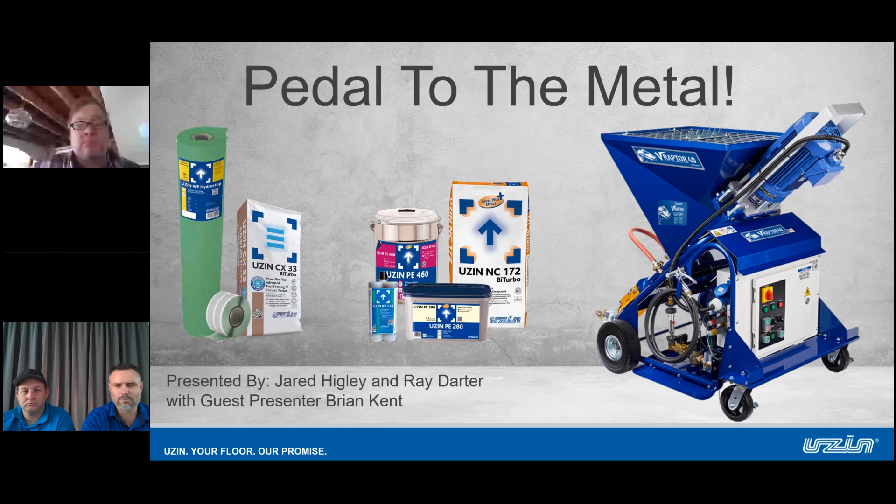We are excited to present to you our three rapid systems today. One of those being the UZIN self-leveling pump. Along with the other systems we're going to share today, we have on the left of the screen there the rapid waterproofing system. And here in the middle, we have the rapid moisture mitigation system.

Good morning, everybody. My name is Brian Kent. I am the pump program manager at UZIN North America. I've been pumping concrete materials for about 26 years now. Been at UZIN for about 3.5.

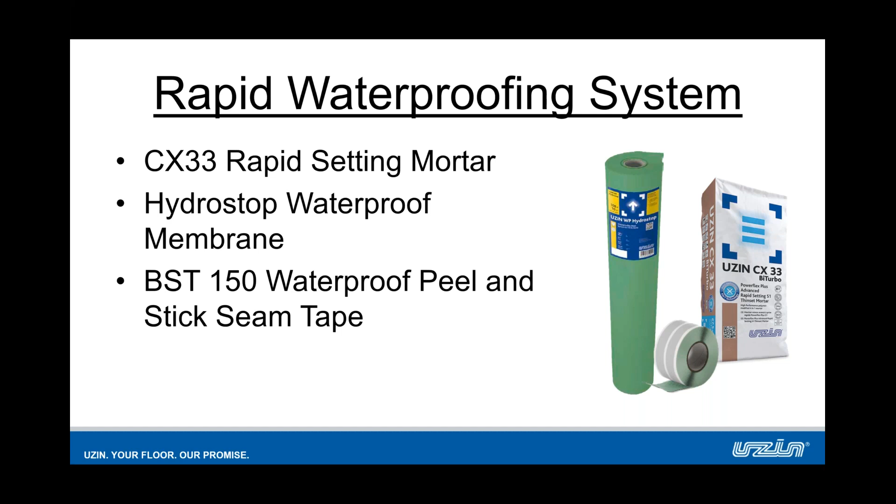Let's talk a little bit about the waterproof system in general. Here's the components for the system, but what is HydroStop? It is a waterproof sheet membrane that is bonded to walls and pans topically with cement-based mortars and adhesives. All of the joints on the membrane are overlapped or they're butted together and gone over the top with seam tape. We use pre-manufactured inside and outside corners to seal those corners.

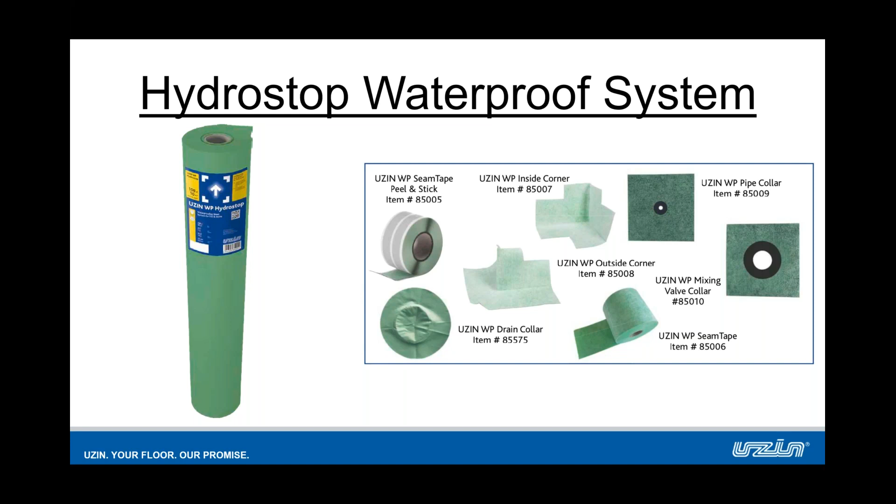We have a mixing valve and a pipe collar, as well as a drain collar there to complete the different components of the system. So what we have with this system is a complete waterproof barrier from topical moisture intrusion. With our rapid system, we want to bond these components of the waterproof system, the HydroStop system, with CX33. CX33 is our speed set.

We can grout in as little as 2.5 hours, but it's so much more than that. We can use this for vertical applications with large format tile based on the non-sag characteristic of this mortar. We have excellent vertical hold here with this mortar. It's very fine, very smooth, which we show there, for easy handling with the trowel. But beyond that, we can use it for any size tile. We can use it for small tile installations as well as large tile installations.

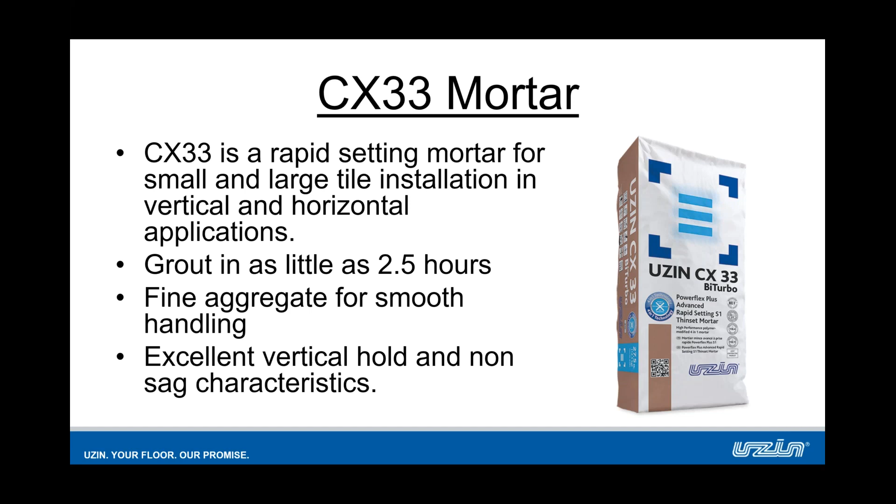Let's talk a little bit more about the HydroStop membrane itself. It's a polyethylene sheet system. The fabric allows us to get a really good bond to our substrate, as well as the thin set bonding with tile to the membrane itself. We get a really good bond with that fabric. But we're not just doing standard waterproofing with this. We are meeting and exceeding the different standards that are out there, from the ANSI 118.10 to the EMICODE EC1 Plus and the ASTM E96.

ASTM E96, we've got a perm rating of 0.05, and that test is measuring a material's permeable value under set conditions. So what does that 0.05 mean? Well, anything 0.5 and below can be used for waterproofing in a steam shower application, even commercial steam shower applications, without the need of a secondary waterproof membrane. Okay, so we're well below that benchmark.

We're at 0.05. The ANSI 118.10, this is the standard that our industry uses for waterproofing membranes. We're meeting expectations with no fungus growth, with no water penetration with the waterproofness test. But then we're exceeding expectations with our breaking strength. The 118.10 calls out for 170 pounds. We're at 865 pounds breaking strength. It calls out for 8 pounds of seam strength, and we're at 48 pounds with seam strength. So we're exceeding that standard.

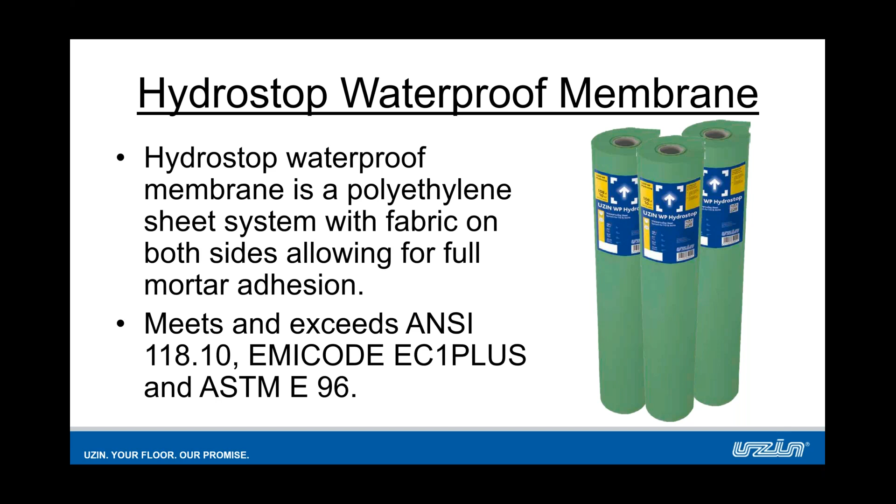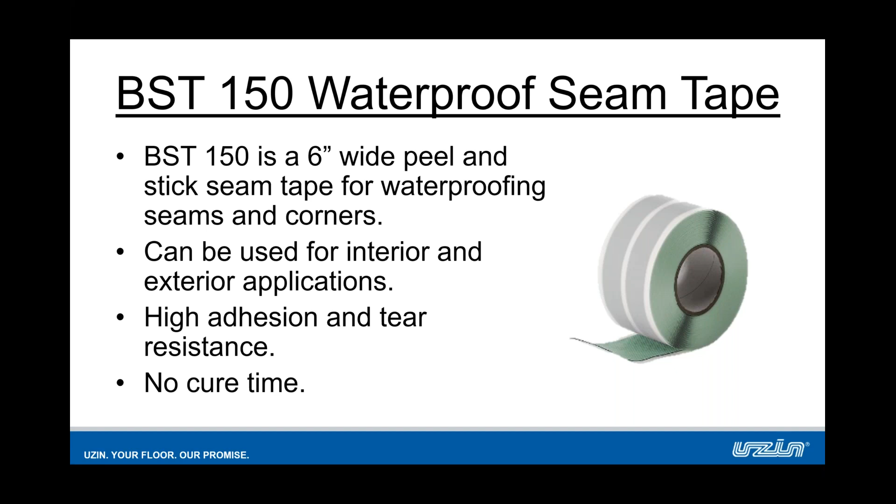And the final component of our system, we have the BST 150 waterproof seam tape. No cure time. That's the important part of this product. We can peel and stick and put this down over our change in plane where our wall meets our pan. Any seams that are butting up against each other, we can use this to go over the top with no cure time. And when we're utilizing these components, we have no downtime. We can flood test immediately with the use of CX33, HydroStop, and BST 150.

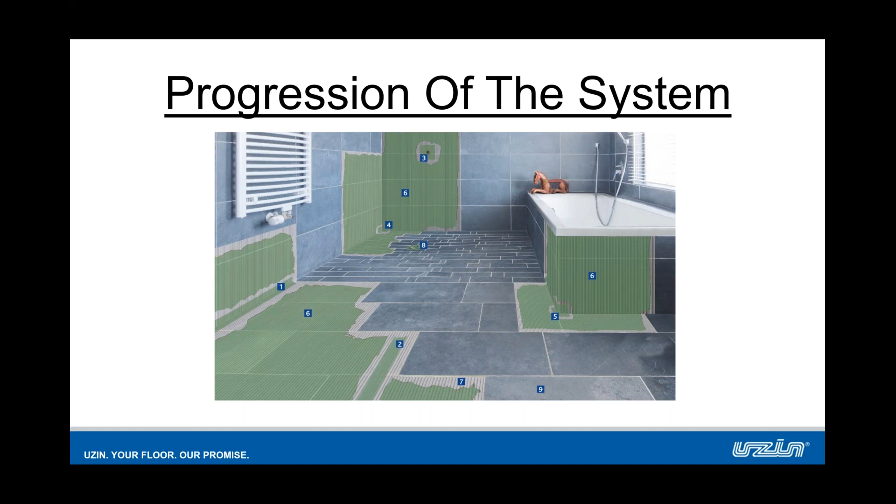And where can we use this system? We can use it in residential, commercial showers, multifamily, hospitality, commercial. And again, we're going beyond typical showers to commercial and commercial steam showers.

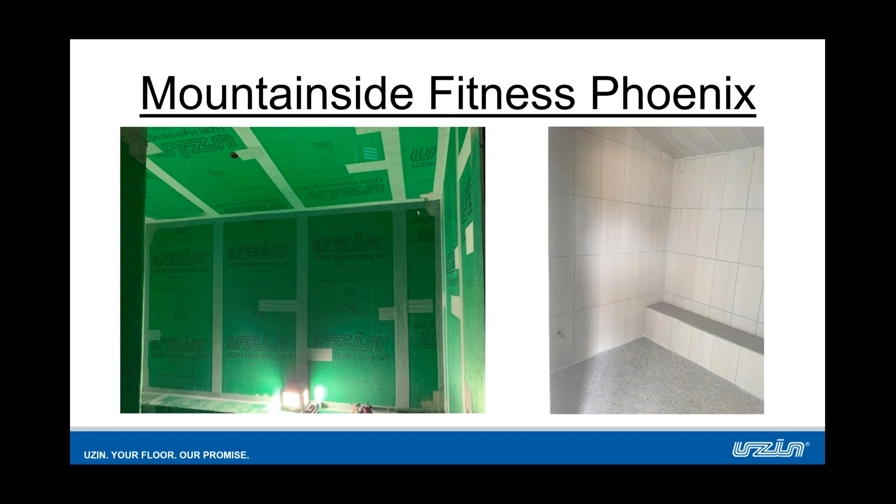And here's one that we were a part of at Mountainside Fitness here in Phoenix. This is a great representation of the system with CX33 used to bond the HydroStop and the seam tape used, the peel and stick seam tape used over the top. And this is a commercial shower.

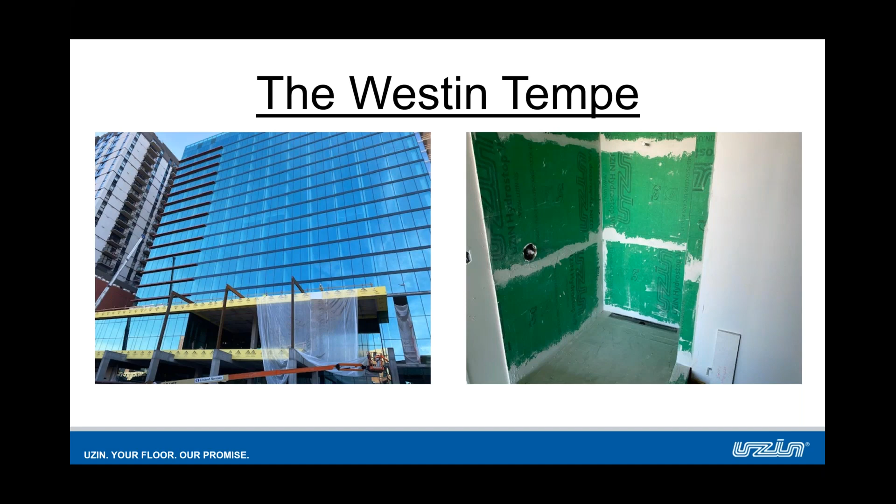So what can we take away from this system? Well, we have a high performing waterproofing system. We're going beyond standard waterproofing in showers to commercial steam showers. We're ready for tile installation or flood testing immediately after waterproofing installation. This eliminates downtime and allows for fast track installations to meet extreme deadlines.

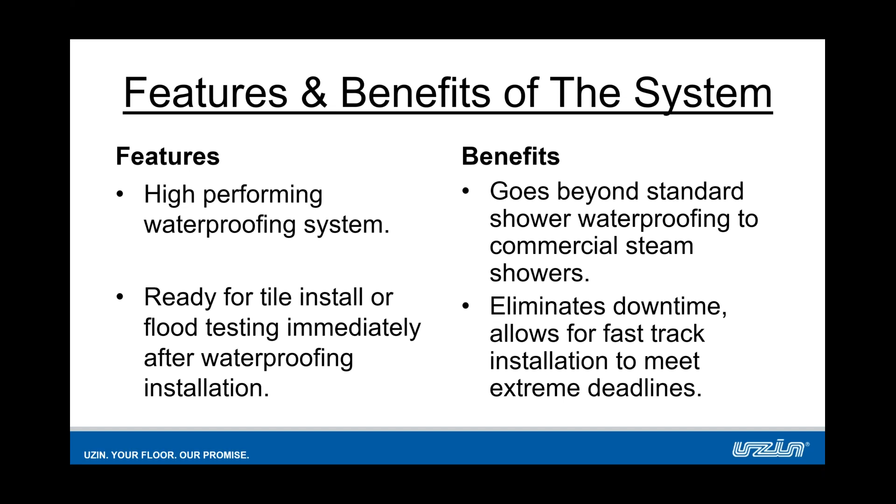So what is our proposition for you for productivity? Well, with the HydroStop rapid waterproofing system, we can install and flood test immediately rather than waiting for mortar to cure prior to flood testing. This can typically save 12 to 24 hours of downtime. This helps us meet job deadlines and gets us to the next project sooner, thus completing more projects and making the contractor more profitable.

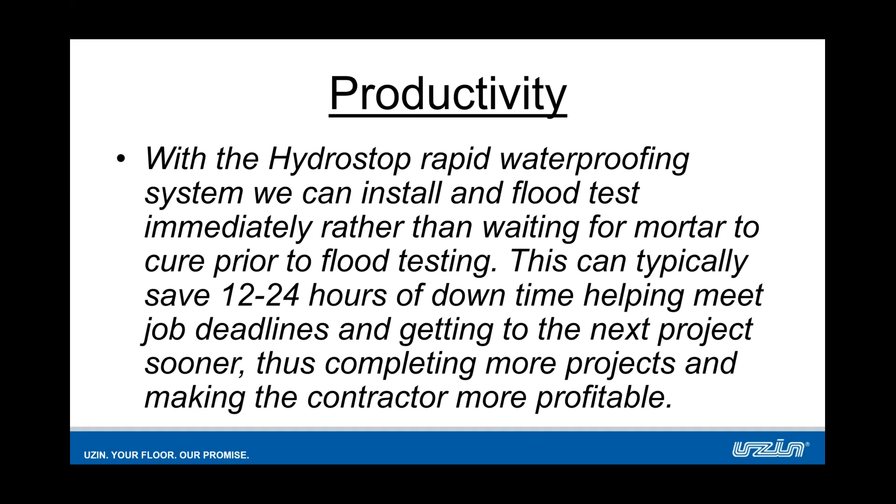Thank you, Ray. All right, let's talk a little bit about rapid moisture mitigation. Here we have the pictures for the system for a rapid setting moisture mitigation. Starting in the bottom left, you'll see a 2-tube resin there that's mixed. It's our KR518. We have it in parentheses as needed. We'll go into that a little bit, but that is a 2-component resin-based joint filler.

The silver can there is PE460. That is our two-component, 100% solids, 100% RH moisture tolerant epoxy. And then the accelerators in the little brown box, that is an additive that we can add to the epoxy to accelerate the cure time on that.

The epoxy comes in two sizes. We have a 2.5 gallon kit, which is what's shown there. We also have a single gallon kit. When you're adding accelerators to this product, you're going to want to go 2 bottles for a 2.5 gallon kit and 1 bottle for a single gallon kit.

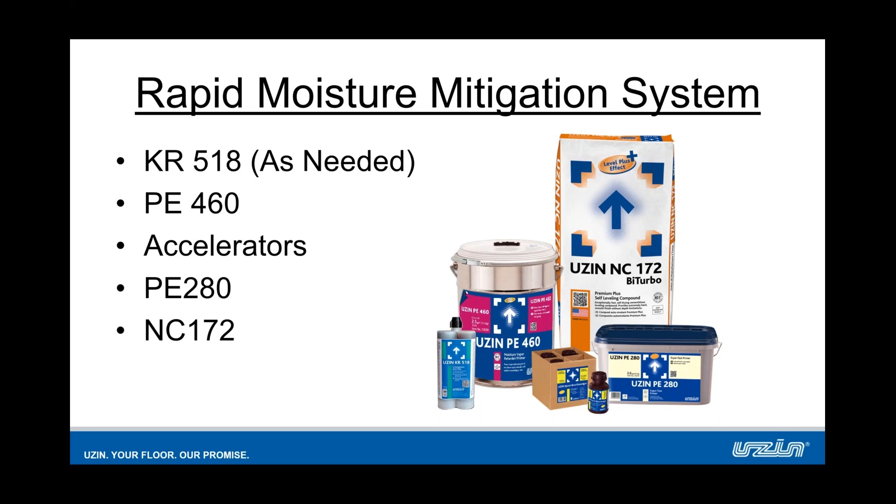Next is our non-porous primer, the PE280 in the square bucket in the bottom right hand part of the screen. That is a strictly non-porous primer, suitable to go over the PE460 epoxy. And then last but certainly not least is the NC172 rapid setting premium plus self-leveling compound.

All right, so let's talk about the beginning, KR518. This is a resin that we use to fill the saw joints, fill the cracks prior to the application of moisture mitigation and prep compounds. It is an interior exterior rated product. As it is mixed and applied in a spiral tube, it comes out with a very low viscosity, almost water-like is what I've been told. And this is good for deep penetration of the joints so that we make sure we get good body in those joints and those cracks.

It's also got a very high compressive strength, which is very, very necessary. Having this high compressive strength, it's not going to be a weak point in the system. If this joint filler were to be a soft joint filler and we had some heavy point loads rolling over it, we could potentially crack our topical moisture barrier, which would then totally defeat the purpose of the system.

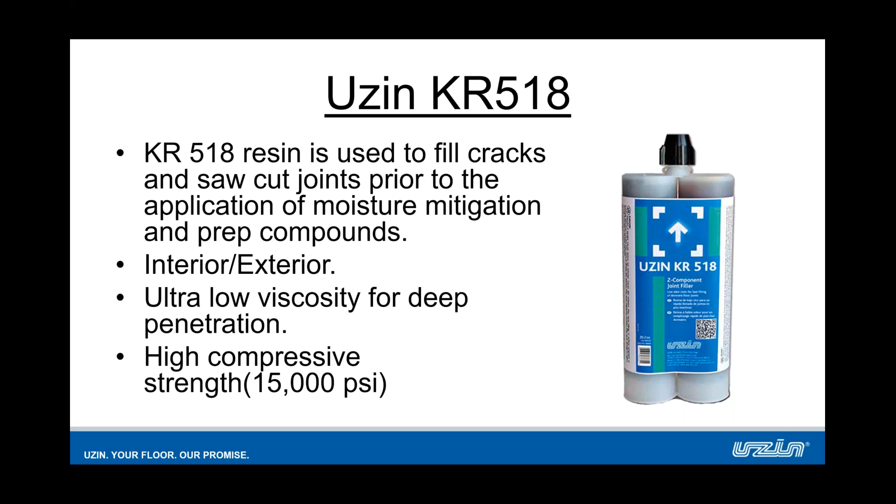All right, PE460 with the accelerators. As I said before, PE460 is a 2-component epoxy resin, and it's used to block that 100% RH. When you add the accelerators in this, we're taking a cure time of typically 10 to 14 hours roughly, depending on substrate temperature, depending on ambient temperature.

Adding this accelerator is going to cut it down to 3.5 hours, which is one of the fastest setting epoxies that I'm aware of that is cured, ready to go over the top of. With these products, a lot of times with epoxy, you have the worry or the fear that it's going to stink, that it's going to have a very high VOC rating. We have a very low VOC rating on our epoxy. It is LEED certified, so you're not going to fill the air with a very smelly material there.

And then the workability of the product. It is a very, very fluid material after it's been mixed. So you're not troweling and struggling to get this product out and onto the floor. It's very, very workable, easy to spread.

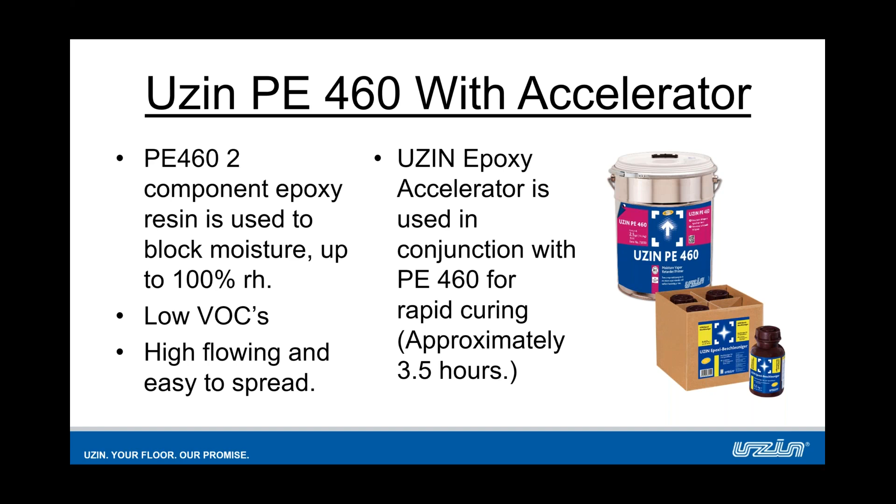The PE 280, this is what we talked about before as well. This is strictly a non-porous primer. So we are only applying this primer over non-porous surfaces. So the 460, once cured, is now a non-porous surface. We do need to use the PE 280 on top of that for our bonding primer.

It has a carbon fiber technology in it, much like a gritted sand in the primer, that when you roll or apply this with a 3/8 nap nylon roller, you're going to get a well-keyed surface. You're going to get a rough surface similar to the texture of sandpaper. This is going to allow your prep compounds to stick with a very, very good bond and give some aggregate there for the product to stick.

One thing I will say: if you get this product on your job, prior to applying it directly to the floor, you are going to want to stir that bucket. There is some settling that happens down in the base of the bucket where that carbon fiber, that sand, sits down in the bottom. You want to stir it, agitate it, get it well mixed and thoroughly mixed into the primer.

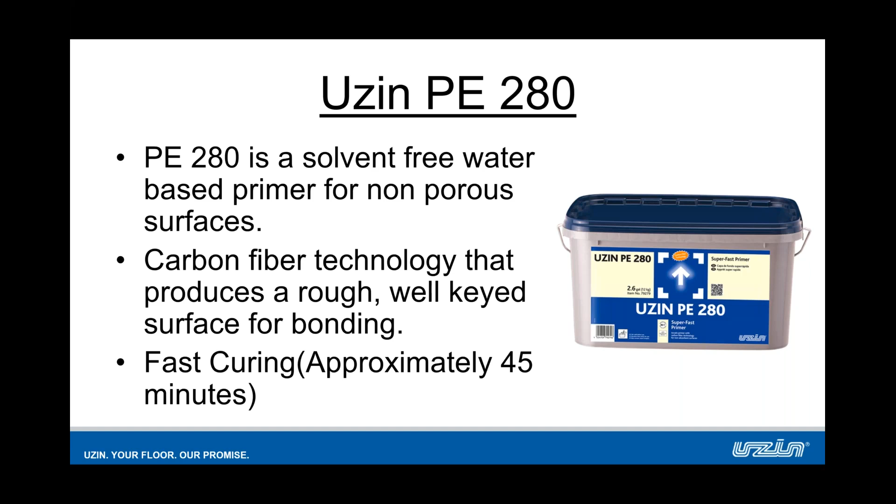And then to go along with this, it would not be a rapid setting system if we didn't have a fast cure. So you can see there at the bottom bullet point, approximately 45 minutes. This is going to save us a ton of time to be able to get right back onto this primer in a very short period of time to apply our prep compound.

And this is our prep compound. This is NC172. This is a rapid setting self-leveling compound. It gives you an extremely smooth, cover ready surface. And here's the kicker: ready for floor covering in as little as 1 hour for moisture sensitive flooring. That is incredible. And to my knowledge, I don't know of another self-leveler that is able to be covered in as little as an hour.

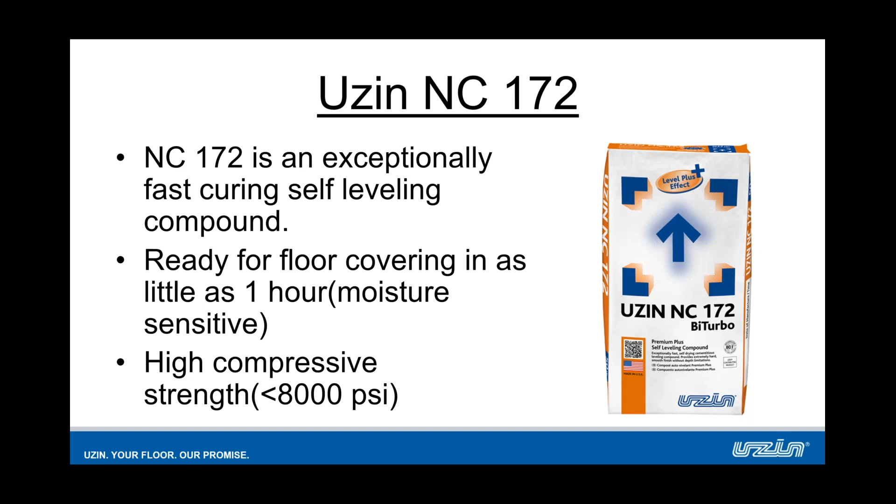And then the high compressive strength. We're going to be able to put this in areas subject to high point loads, heavy wheel traffic. This is a very, very dense material, very strong material.

Here's a picture of the progression of the system, starting from right going left. We have the concrete substrate, and you can treat this substrate with the KR518 as needed for those cracks and joints. And then moving onward to the left side, our PE 460 primer with the accelerator. After that's cured, PE 280 super fast primer, finally finishing it off, smoothing out the surface, getting it cover ready with the NC 172 self-leveling compound.

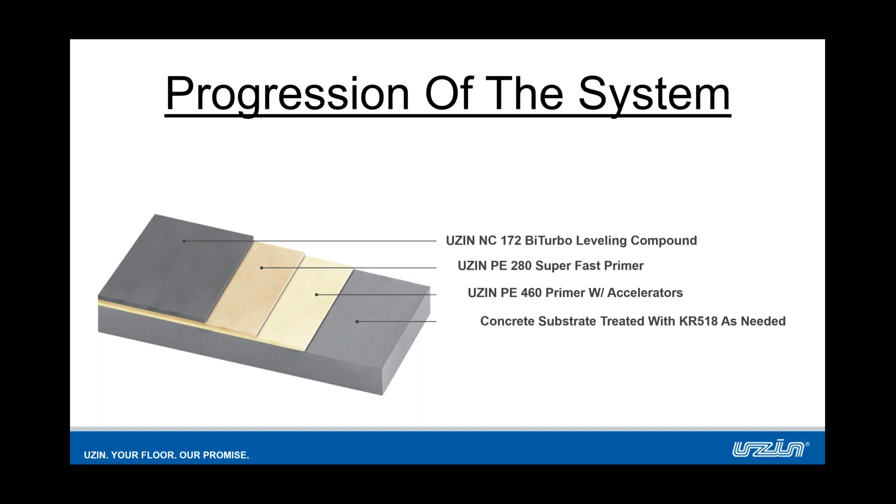So where do we have opportunities for this? Well, moisture is a major problem in this country. We see all across the United States and North America, moisture is constantly causing and wreaking havoc on flooring.

So medical facilities, sometimes hospitals don't even want to roll the dice, if you will, without putting a moisture system down. They say, no, this is a requirement. We need moisture systems. We don't want this to ever fail. So go ahead and fix it and make sure that it's not going to be a problem for us.

Public and federal projects, government buildings, schools, things like that, post offices, night work, commercial and retail. These are all opportunities where, if we run into a problem, we have a speed or rapid setting system that can get these projects turned around in a relatively short amount of time.

So here's some of the jobs that we've done. This is the Stream Data Center. This is a 20,000 square foot, one giant square room, a dream job when it comes to applying anything really. You want just a nice big wide open room. This was it. Like I said, it's 20,000 square feet.

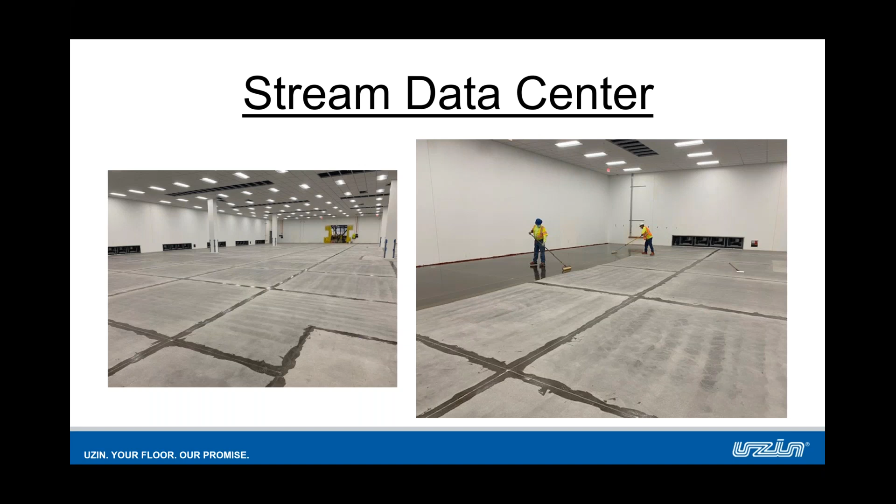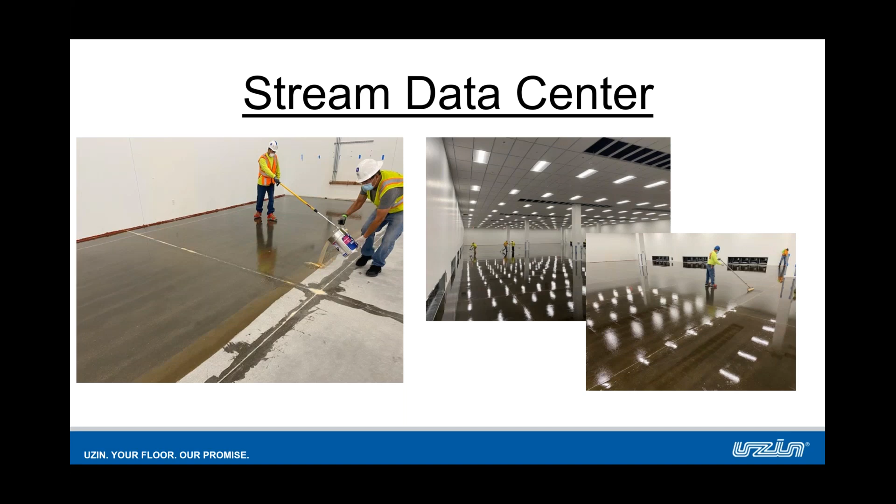You can see the joints were treated and prepped prior to the application of the epoxy. And here in the next slide, you actually see the epoxy coming out of the can and being applied, and then nice big shots of the job completely covered, showing the reflection of the lights. It's just a very beautiful job. It was a pleasure to be a part of.

Some of the features and benefits of this system: these fast curing components. We're all about meeting demand, and being in the flooring trade, we are usually the last ones on the job. We're constantly having to make up time from what other trades fell behind on, and general contractors will look to us, will push us to get the job done fast.

Well, typically we take on these challenges, and maybe we're using products that aren't really meant to be used in those applications. So the flooring contractor's rolling the dice. They're saying, hey, we got to get it done. We got to do what we got to do. We're going to push the envelope here, and now we're installing products outside of data sheet limitations. So having these fast curing components, we can meet these projects with the comfort and peace of mind, knowing that we're doing it properly.

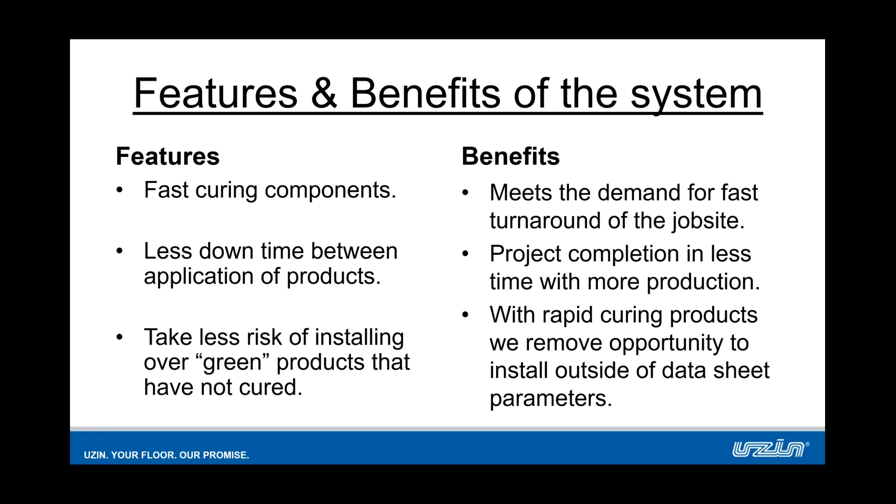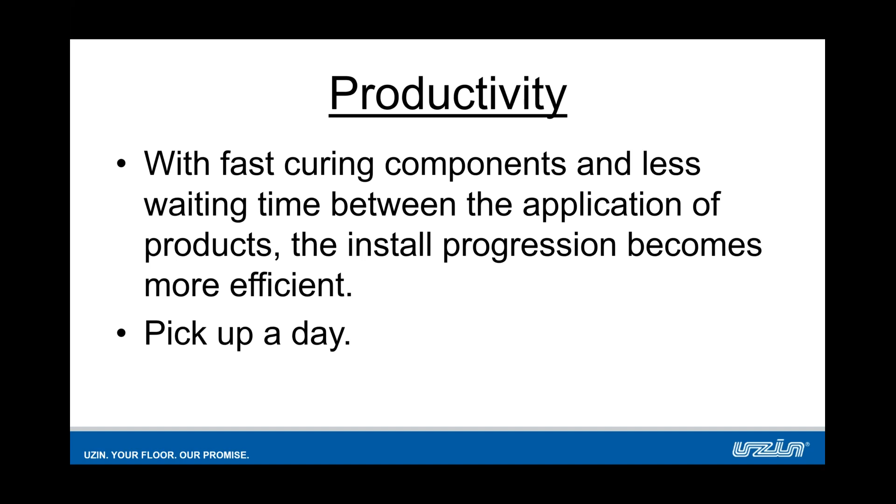So productivity, that's what we're encouraging our working partners to increase. We want to increase your productivity. So with these fast curing components and the lack of waiting in between applications, we're getting on it faster. We're going to make the progression of the install extremely more efficient. And the time that we pick up, minimum a day. I can't stress enough how much time we save with this system.

So we're going to show you a video here. This is just a quick little rundown of how this product is installed.

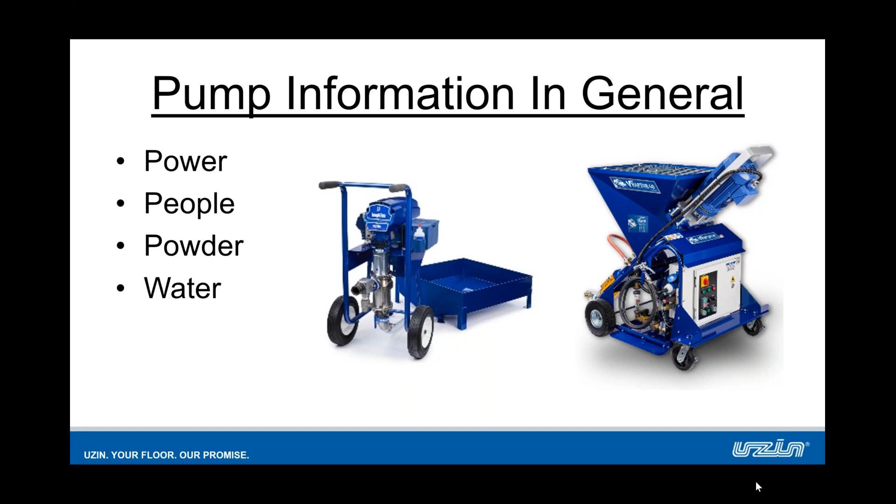Okay, let's go over the V-Raptor details. Okay, this is a gravity-fed automatic mixing pump. Really love this machine. It's lightweight, it's versatile, it fits through regular doorways. It does require 240 3 phase power with 30 amp breaker.

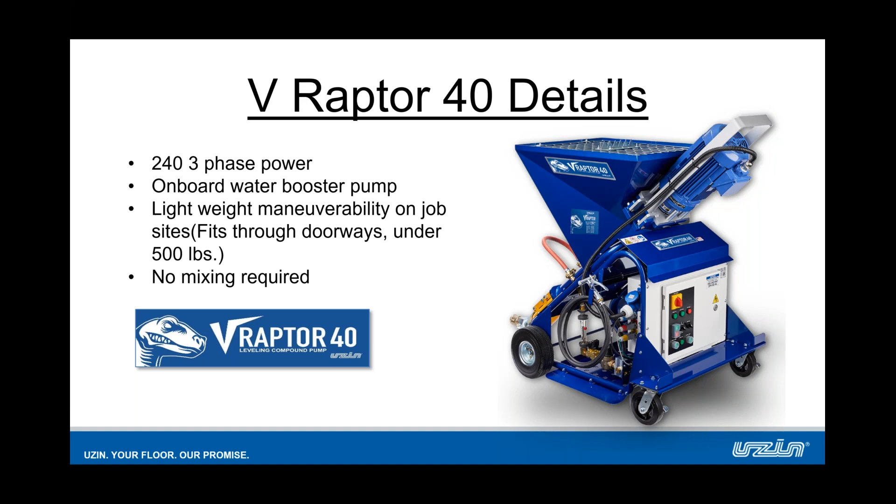We've had a lot of success with this machine, not just on grade, but also vertical push, which we're going to show you some slides coming up. That's just a quick rundown of this machine. We'll get more in depth in later slides.

Okay, historic renovation. This is the Wonder Bread factory in Toledo, Ohio. And there are many reasons I picked out this job site. Okay, they reached out to us and said, look, we have no elevator. We have to get 27 skids of material up 2-3 stories into this old building. We need some help. So their first step was they reached out to their local sales rep.

Listen, before you think you can't do it or your crew can't do it, call us. And you're going to hear me say that a lot throughout this presentation. Okay, this job was poured in about 9 hours and 25 minutes, 23 to 25 skids of material, and that is with washout.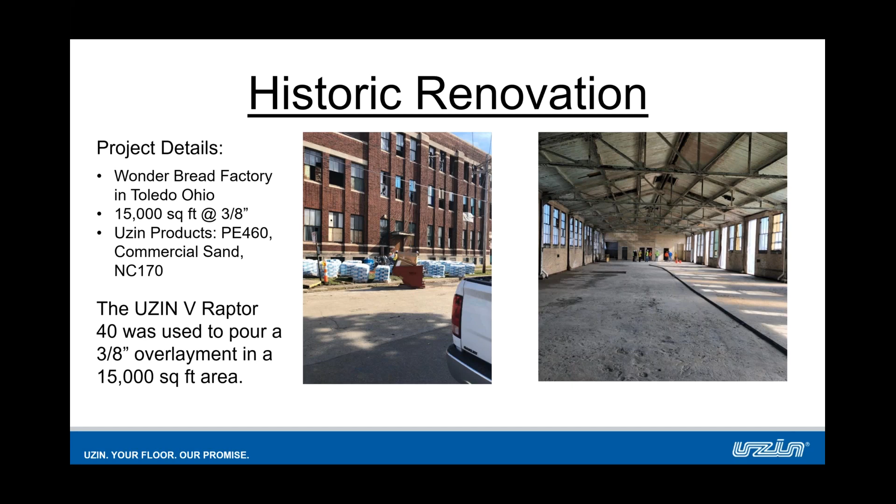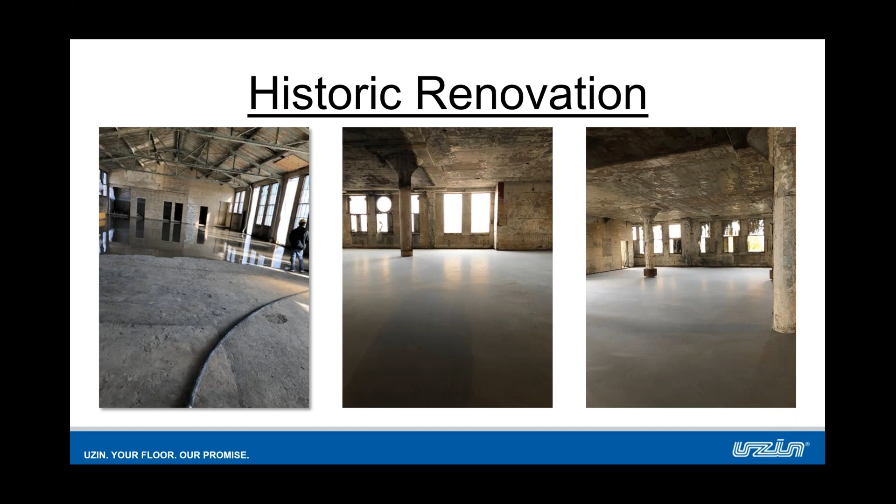One interesting point about this crew and this project, this crew has never ever prepped or poured self-leveling in their life, let alone pumped it. So keep that in mind. Next slide.

Here's a quick video just to walk those of you, some of you may have pumped, some of you may not have, but if you enjoy this, it's always fun watching, and everybody loves videos and pictures. This shows the V-Raptor, the MP40 in action.

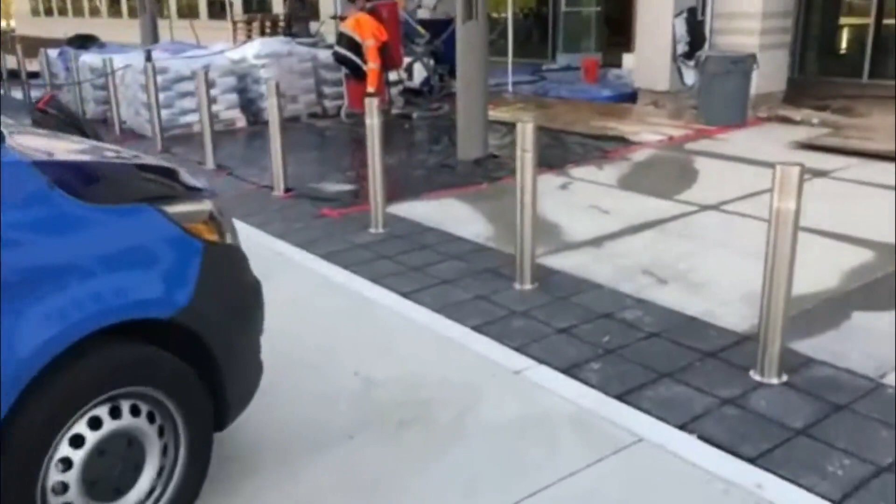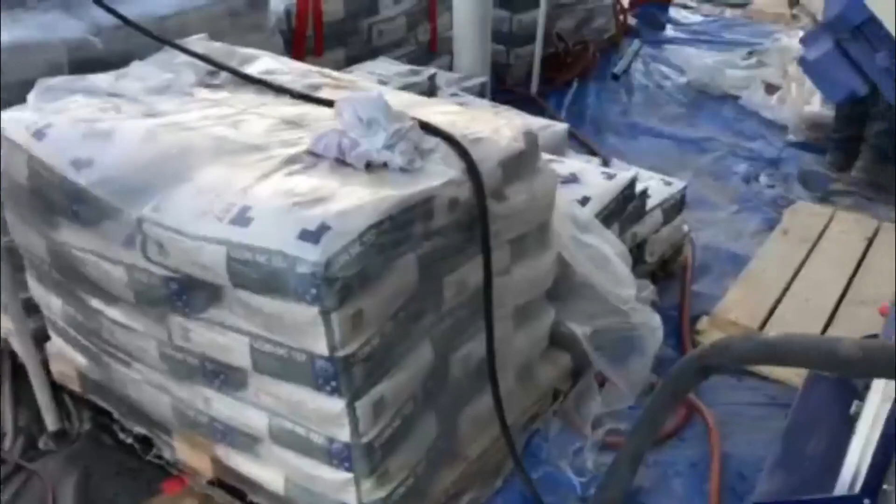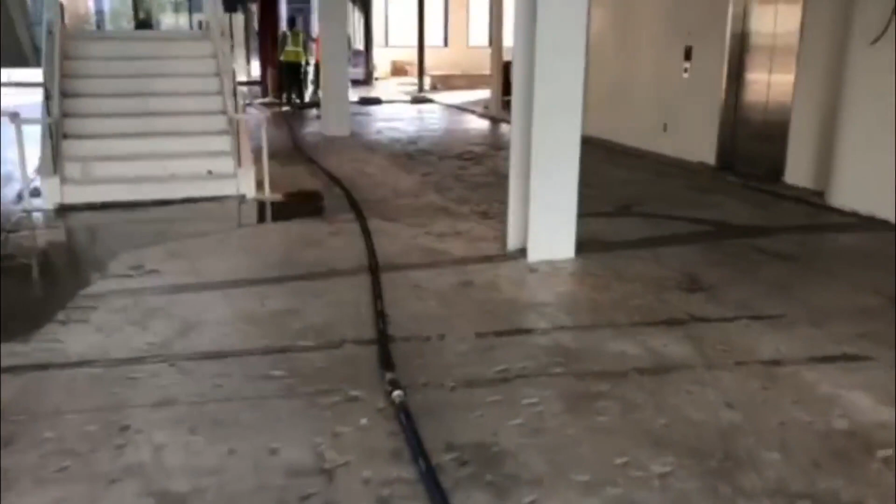Okay, it looks like we don't have sound for this one, so I'll go ahead and walk you through it. As you can see, we have a nice tidy job set up there. The material is staged close to the machine, so the guys that are actually physically breaking the bags don't have to walk 10 and 20 feet and trip over the hoses. It's for safety and accessibility reasons. There's our install area. As you can see, we have nice reflections in the product.

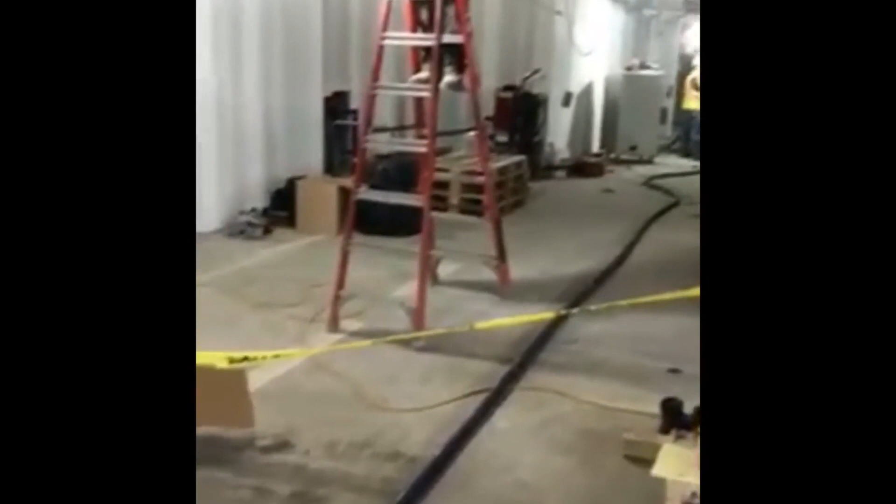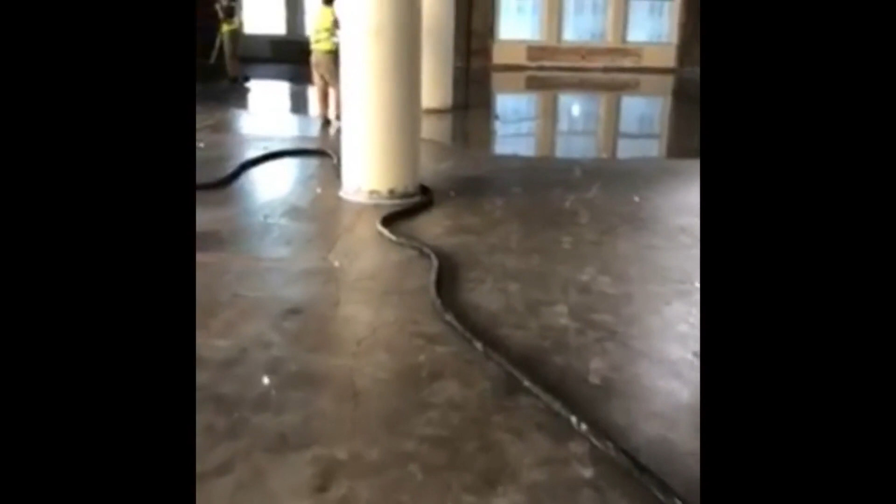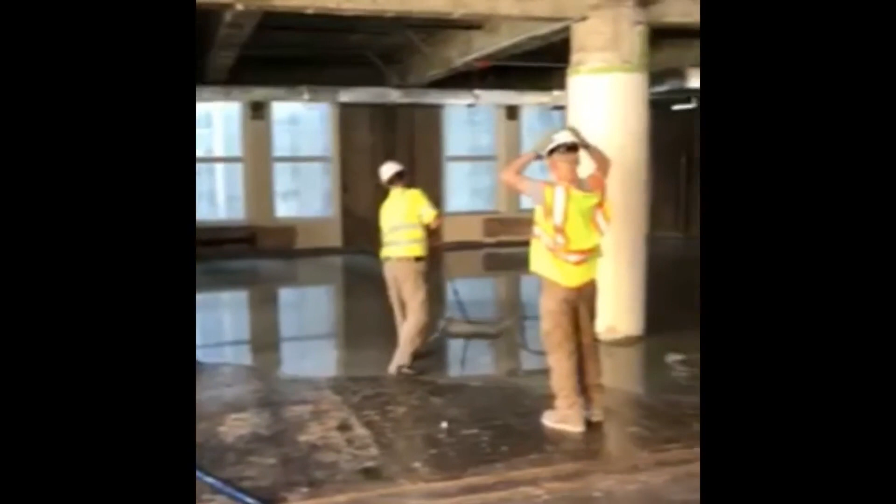Another thing I want to note about this job is these guys are communicating with two-way radios, same as this job in this video. Very important not to use your cell phones, everybody out there that's listening. It doesn't work, it's going to frustrate you, and it's dangerous. Please go to a local hardware store, spend the 40 or 50 bucks on some two-way radios. Make sure they're charged the night before, okay? Because communication ties right in with safety, okay? As you can see, there's our install area as well.

Okay, let's move on. The little Micro Raptor. This is a handy little machine. Crews love it because you can simply plug it into the wall, 110 outlet. There's a green button for on, a red button for off, and a dial for your speed, okay? This thing is a small machine that really packs a punch. It can go vertical to 3 stories, has no problem pumping through 400 feet of delivery system.

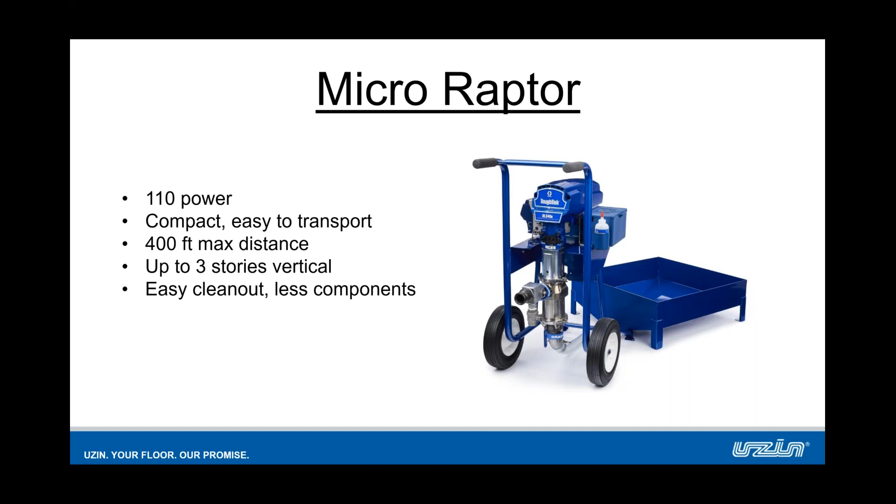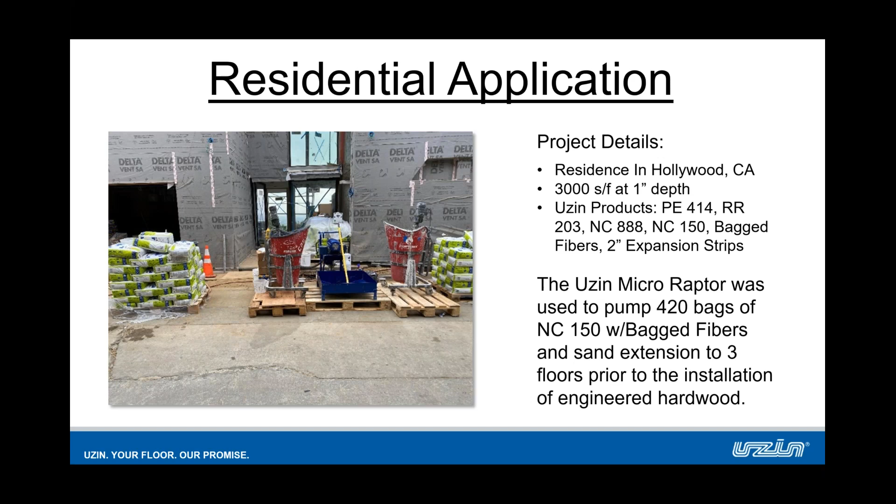You're going to see some pictures of this job site moving forward that show the interior and just why this machine helped us so much. This house was actually built on a hillside, and it was either 3 or 4 stories vertical that overlooked Los Angeles, California.

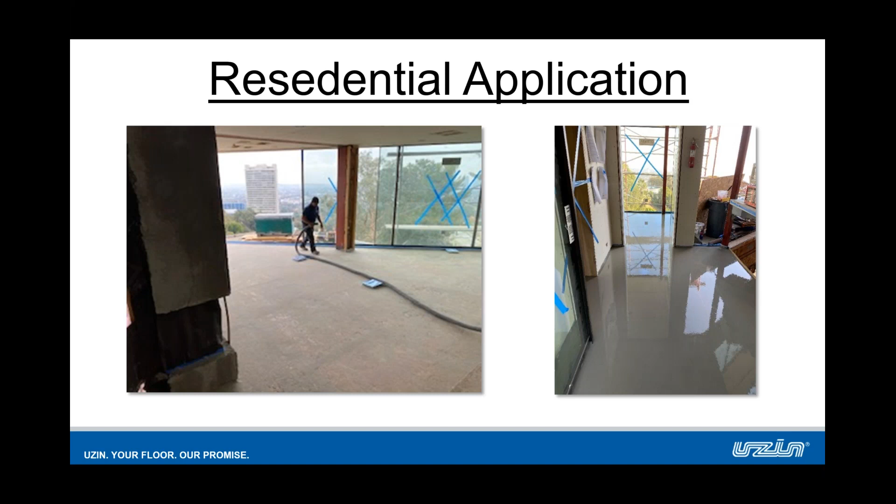So here you are on the inside of this structure. This machine was so handy because there were pushes of 300 and 350 feet to access all the points of this house, and that little machine struggled not one little bit. It pumped it all day long, twice on Sunday. Let's watch a little video of this little UZIN Micro in action.

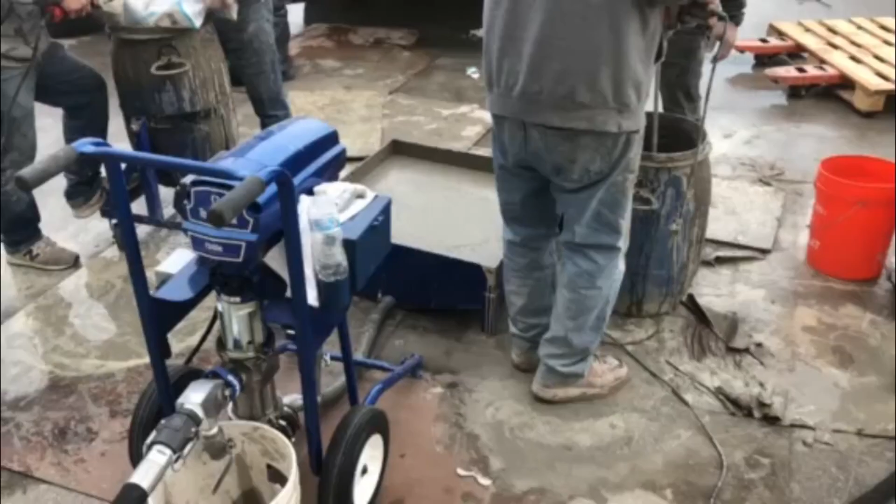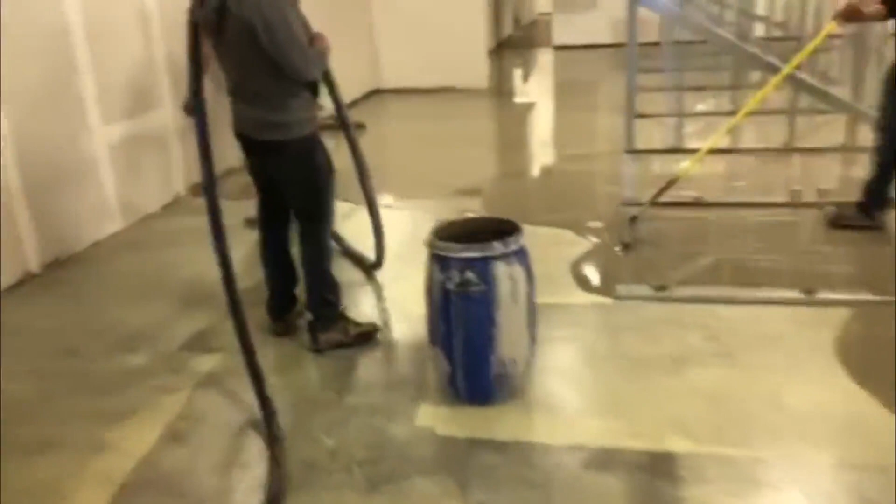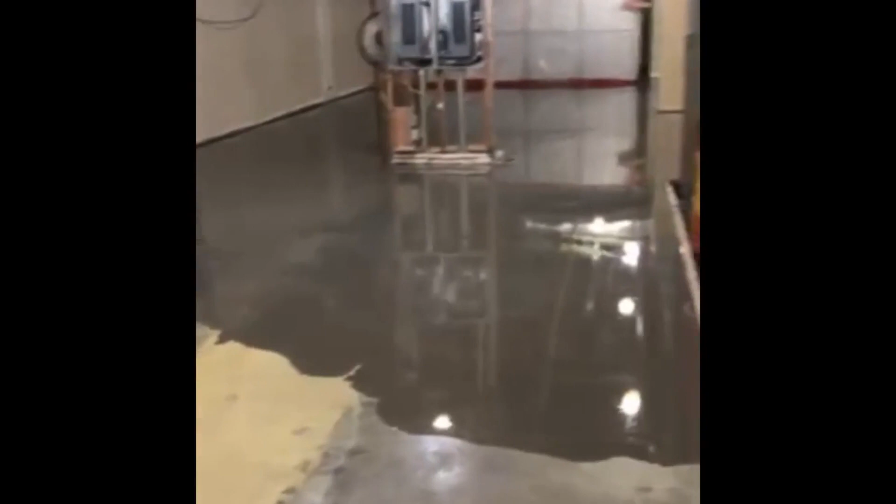Turns out we didn't have any volume on this video either. But you'll see the small setup, and here's the installation area. It looks like they're only pushing about 100 feet in this job. But it shows that if your crew's not quite ready for 200 bags an hour in these giant installs, this machine is nice, easy, versatile. You can fit it in the back of a pickup truck, and all the guys are very confident using it.

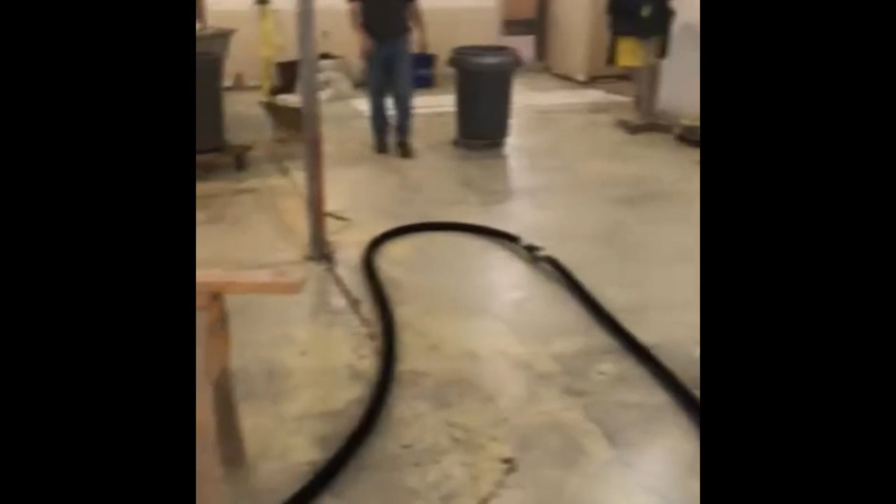We've had many crews that doubted themselves. They make the phone call and they decide that they love using them. So it's good stuff.

So meeting deadlines. Listen, by the time you get to placing the material, you've done 90% of the hard work and paid attention to all the details in your prep and using the other products to get ready to pour your self-leveling. All you have to do is make sure you have a tight-knit team that communicates, pays attention to the small details, and the placement of the material is just as easy as barrel mixing.

Okay, thank you, BK. Really appreciate that. So let's talk about the value here. What are we trying to show you? Where there's a will, there's a way, and there's more than one way to skin a cat when it comes to getting these projects done. Whether it's rapid waterproofing, rapid moisture mitigation, or pumping a very large amount of product, we have solutions for you.